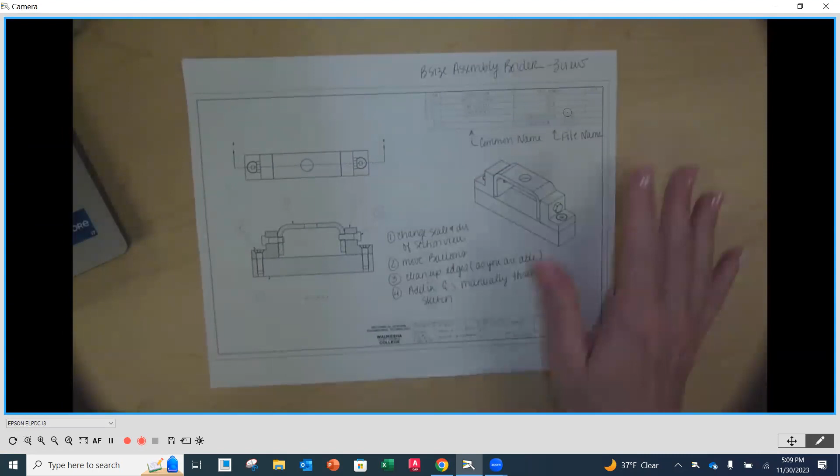So the handout I have up here on the table, if you need to grab it, is this one right here. I have some additional notes, but you're going to be creating this assembly. You'll notice we've got a bill of material up here, so we'll talk about stuff with assemblies. We've got a particular border that we use for assemblies only—this is not the B-size border you normally use for detail parts. This is actually formatted to make an assembly drawing, so it kind of automates this for you. You're going to be putting a pictorial or ISO view in here, and creating a section view so we can see and balloon all the parts.

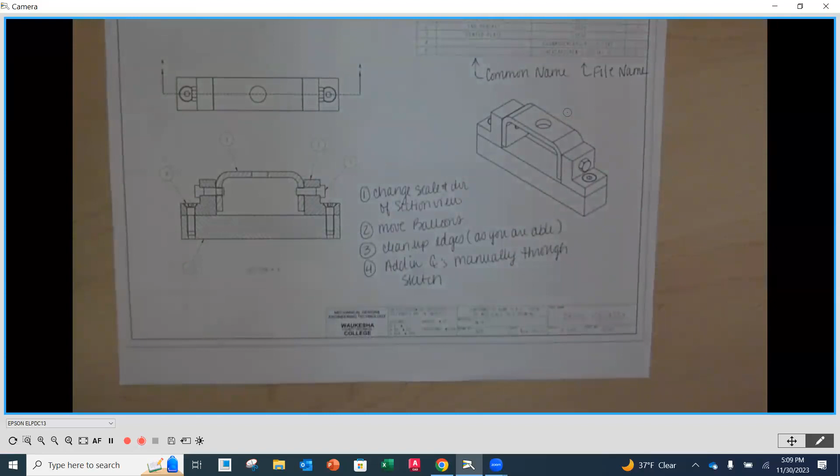So this is what I want to demonstrate for you tonight. Unfortunately, the book we have doesn't do this—it seems like it cuts off just a little bit early. It does assemblies, but it doesn't put them in drawing form. I think that's really important for you to know. So that's what we're going to be doing here.

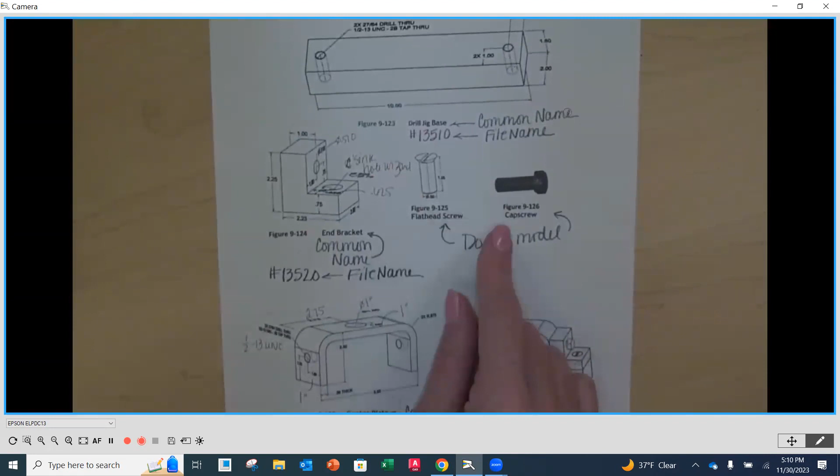The actual assignment sheet is here. For this assignment, you'll be building 3 parts. You're going to create the drill jig base, the end bracket. You will not create these fasteners—we're going to be pulling those in from the library in Creo, and I'll show you how to use that, so do not create those 2 fasteners. Then you'll create this part called the center plate, and they go together in this assembly. It's a small assembly with very simple parts, shouldn't take you long. You're not detailing these—you're just modeling the parts.

So I thought you guys can do that—you'll model the parts. The reason I want you to model the parts is you've probably already experienced, as you go from model to drawing, thinking gosh, I wish I would have used a different view or modeled that a little differently so it would come in easier into my drawing. Well, we've got to think in terms of assemblies as well.

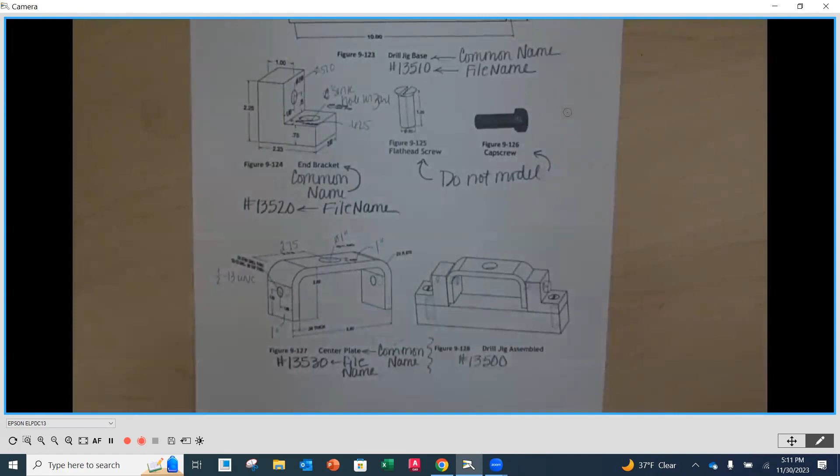So there might be places where center planes might make sense, or the way that you view it, what your front view is, or what your top view is. You want to know how these parts all go together, because that's going to dictate how you model it and how you create the drawing.

So that's what I want to highlight tonight. Now I've already drawn my parts, so I'm going to demo putting this together in an assembly and then also creating the assembly drawing. That's what I need your time for here, that's what this is going to be dedicated to.

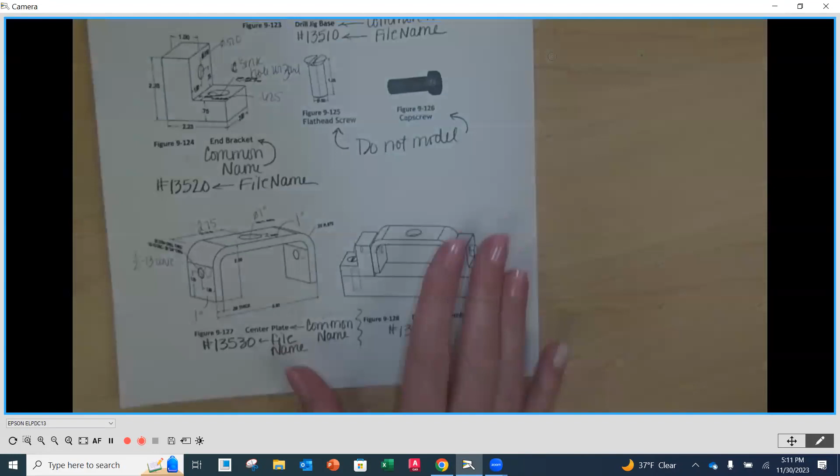So your job number one, when you get this far, is going to be modeling the separate parts here, not the hardware, and then putting it together in your model.

So let me go over to Creo. Oh, I don't have it open. Shoots, okay, just bear with me for just a moment.

So if you happen to be virtual, you know, kind of get these handouts already, they're in our learning plan. Okay, I got to set up my working directory.

Okay, oops, chat. I'm here, but not 100%.

Oh, hi, David. Yes, I know you're not feeling well at all. So thank you, I'm glad you are here. Don't forget, for anybody, if you're not feeling well, I always record these, so feel free to take advantage of that too.

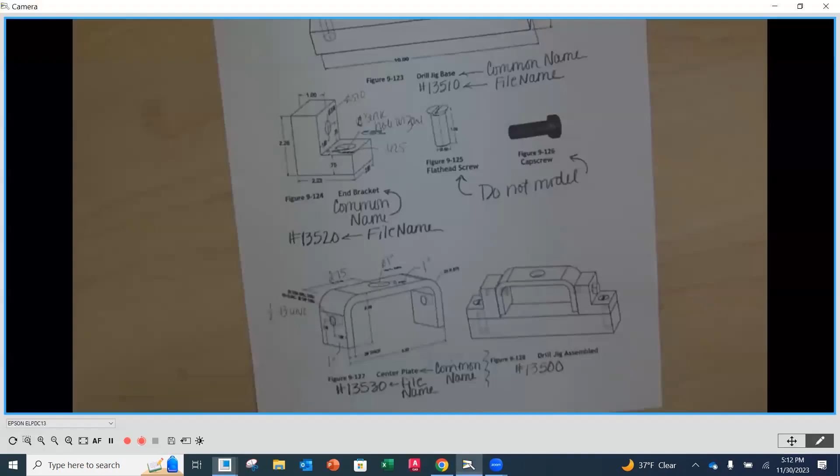So what I'm going to do is I am going to start anew, and I'm going to create an assembly here. Now, when we create our assembly, we're going to be putting our file name in as the number. So on our assembly down here, you're going to notice that the part number is 13500, so that's going to be the part number that we're going to use.

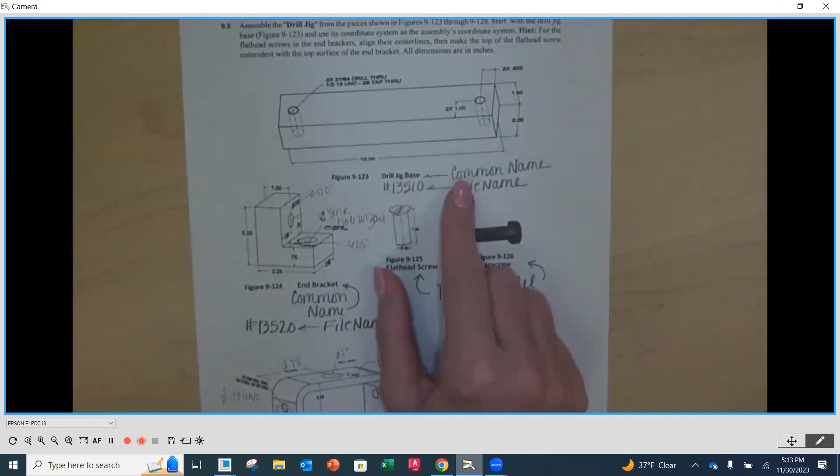Then when we create our, I've already created mine, when you create your drill jig base, your file name is going to be the 13510. But now you're going to be putting in a common name, and you're going to be putting in the part name in common name. I'm going to kind of illustrate that here in Creo.

So you're going to notice file name is going to be my 13500. Now this is going to also be the same thing for when you create a part, or a model. And then common name is going to be drill jig assembly. Now make sure you do that for each one of the parts, because the way that I formatted the bill of material on the assembly drawing border...

You're going to see that we have a new one of those, but I'll get there when we get there. It's going to pull that common name to fill in the bill of material, so we're going to start filling that in as well.

And then I'm going to hit OK. Oh, it does already exist, so let me call it 2.

Sorry. All right, so now you're going to notice that I'm in my assembly mode. So here on my model ribbon, I have the option to pull my first part in for my assembly. So I'm going to go in, and this is where you look at your parts here and want to logically bring in.

Now, does it really matter the order? Not so much, but it's going to be the first one that's the most important one, because that grounds the whole assembly. So you want to think, and most often you want to put this together the way you would anticipate physically putting it together. So we would want to grab our base first.

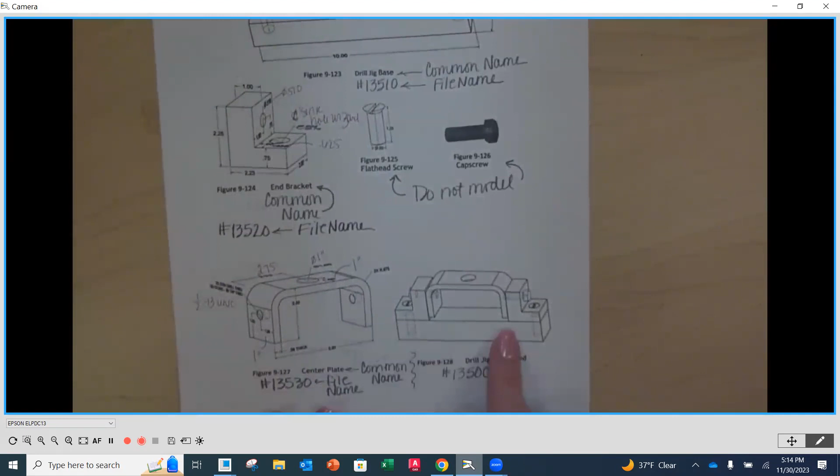So this is called the drill jig base, and I again have mine already modeled. So I'm going to hit the assembly. I'm going to navigate to my working directory where that part number is, and I'm going to open it.

Okay, so then you're going to notice that it's going to automatically come up here and say, where do you want that placed? All right, now this is where, as I look at my assembly, you're going to notice that there is a line of symmetry right down the center here.

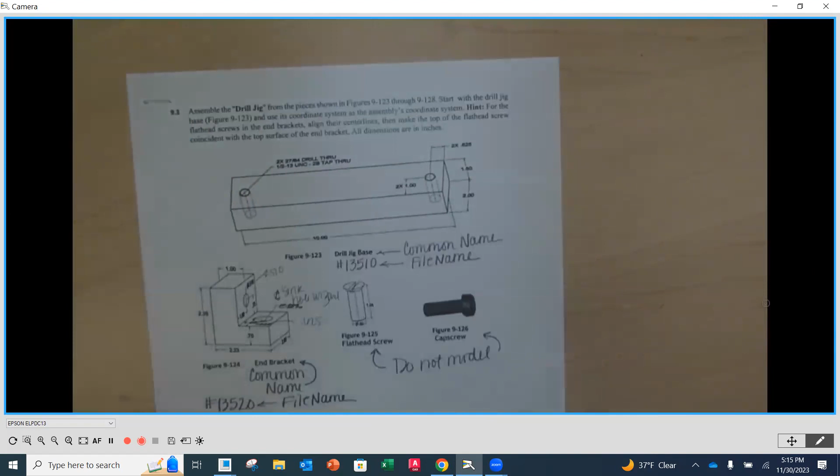Okay, kind of on that, what would be like the front plane here. When I modeled my drill jig base, I put that front plane right down the middle. So when I extruded, I did a symmetrical extrude on that, because I could see that there's that line of symmetry.

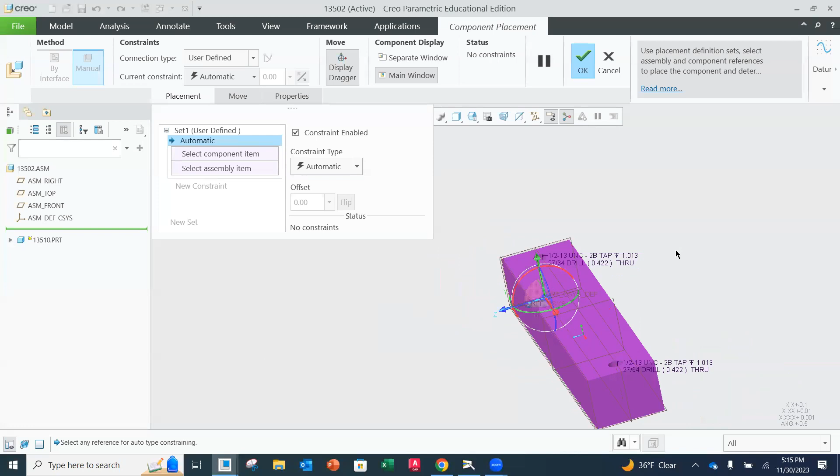And then when I'm in my assembly mode, I can make those planes coincident, and that'll orient parts for me. So what I'm going to do here in Creo is you'll notice that this came in, and there's a center plane down my part. But it's lining up in the back of, if you would, the front plane.

So what I want to do instead is make a coincident constraint, and I'm going to grab the center plane of my part to the front plane of this assembly. Do you see how it moved it so that it's in the middle, so that they're coincident?

Then the next thing I'm going to do is grab a new constraint, and I want to fix this. My first part is always fixed, because now I've got something that's not going to move around.

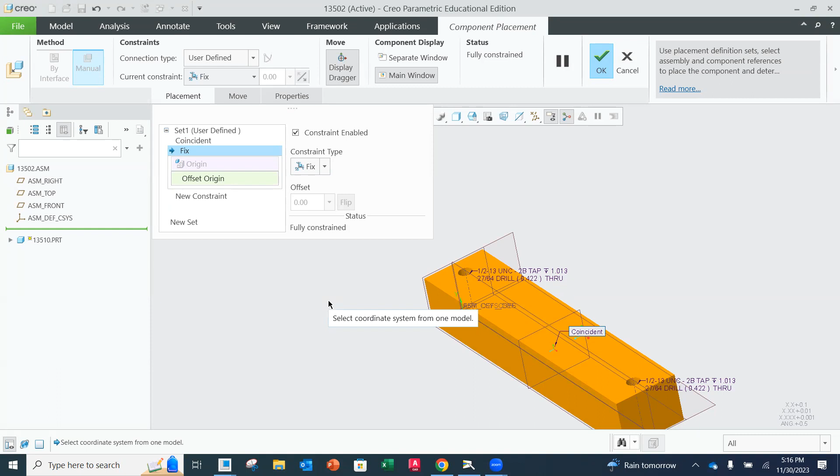They call it something else in SolidWorks. If you guys are familiar with SolidWorks, David, what do they call that in SolidWorks? Is it fix? Maybe you're not hearing me. That's okay. But you always want to do that first part. I forget what it's called, but I think it's this, I think it's when it comes in already defined. No, when you pull in that first part, you usually, what was that? Is it, you anchor it, but it's called something. It is, oh, it is fixed there too as well. Okay, all right, so I guess it is the same terminology.

So now when my part turns this orange color, that means that it's fully constrained, fully defined. You'll learn that if you haven't already gone through chapter 9. So then I can hit the OK button here. Now it will let you hit OK if you're not fully constrained, but that's not a good idea.

And this is where in this assembly, you're going to be submitting the screenshot of the model of the assembly, and then you're going to be doing the PDF of the drawing. So there's going to be 2 parts to this particular assignment. This is assignment number 14.

And over here, if you aren't fully constrained, there's going to be a little rectangle box next to the part number. So when you do your screenshot, I need to see your model tree because that'll tell me if you're fully constrained or not. Depending on how you do it, it should always align with the origin. Yes, you're correct.

Now, the other thing I want to encourage you to do as well is, as we're building these parts and pulling them in, they're all going to be this blah gray color. And it is going to be hard sometimes, especially if you don't have shaded with edges on, to see where one part ends and the other part begins. So one thing I encourage you to do is change the colors.

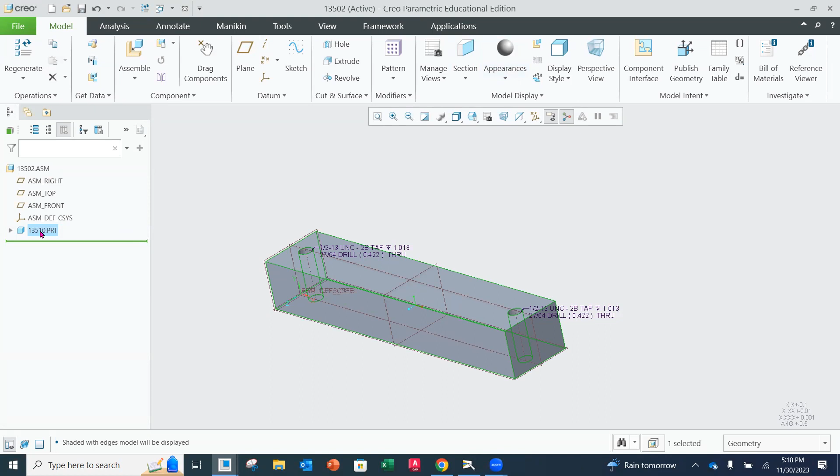And right up here, it's real easy. You just select the part number in the design tree and go up to appearances, and now you can change your color palette. I keep it pretty simple, so I'm just going to assign it yellow. Then as the other parts come in, we'll assign colors too.

All right, so I've got my first one in here. Now I'm just going to hit assemble again, and I'm going to go to my second part, which is 13,520. Open that one, and it's going to pull it in automatically. You'll notice that it's the purple part over here.

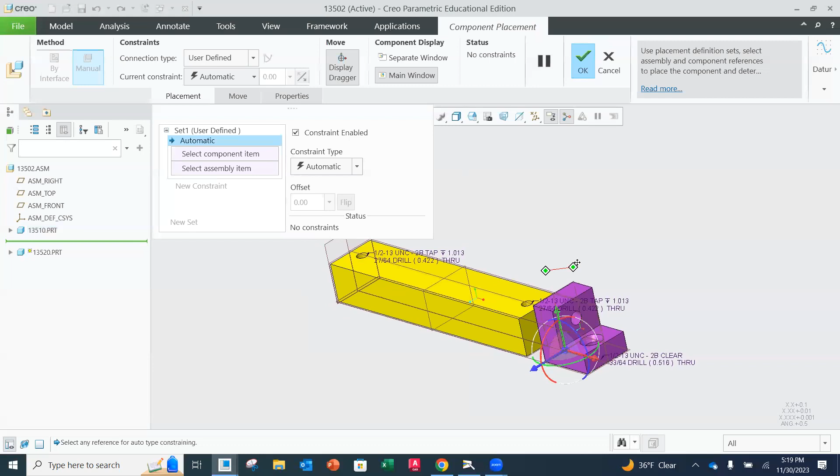And what I like to do with Creo is, if you let Creo or any parametric software make too many decisions, ultimately they'll probably not do what you really want. So I like to get my part as close to being where it needs to be as possible.

You'll notice that you have this globe and arrow thing. If you hover over any one of those, they'll turn orange, and when you left click on it, it'll go in that direction. For instance, let me scooch this up here. I'm going to hover over the green here and lift this straight up, so it only goes in that direction, and when I let go, it stops. There's also these other handles, so this one is going to rotate it around that axis.

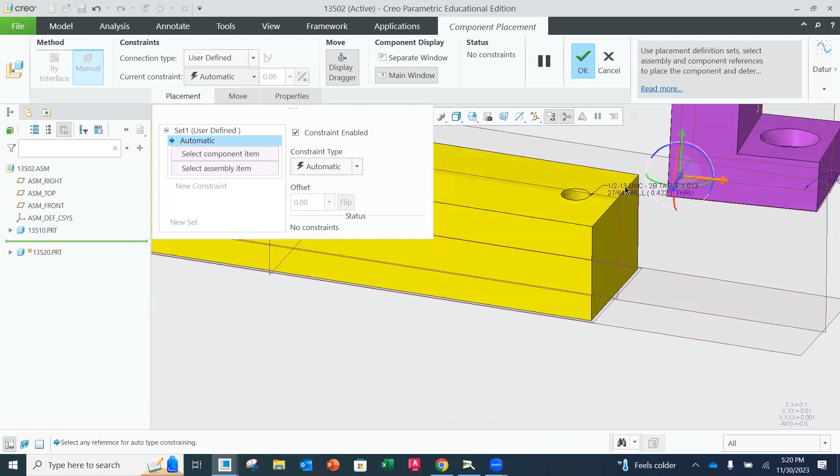It can rotate it in this direction as well. So like I said, I like to get it as close to where it needs to be so that I can still select. I'm going to pull this back a little bit.

You'll notice it's not perfectly aligned right now. It's okay, because I'll do that through my constraints. So now that I have this here, the first thing I want is for the holes to align from my top part to my base. I'm going to change this from automatic to coincident, and click on one center line to the other center line. There we go, now the center lines are in line with one another.

Now in the book, they will also have you click on the inside wall of a hole. You could do that as well, but I tend to align center lines or the axes.

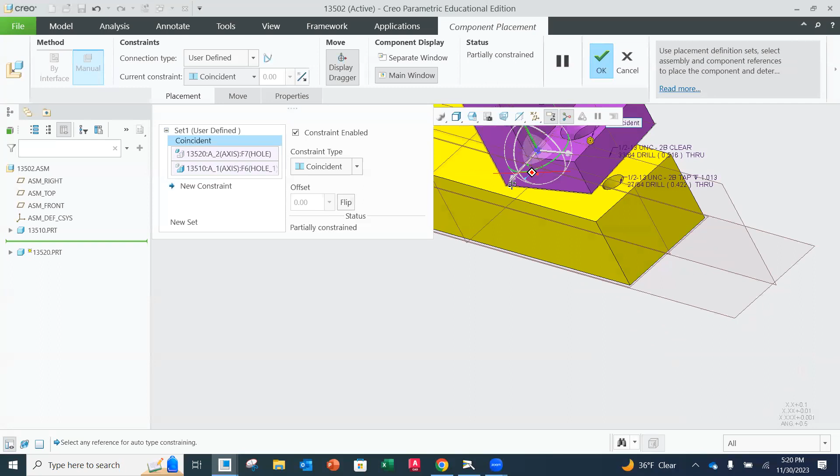So that one's done, now that's one constraint. You'll notice that I'm not orange yet, so that means I'm not fully constrained. You'll also see that I don't have all of my whole globe, if you would. There's a name for it, I forget what it's called, but it's not all white.

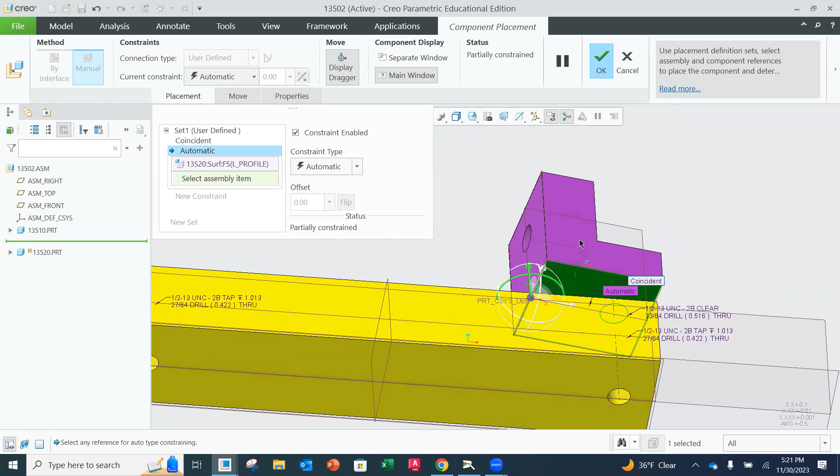So then I need to add a new constraint. My screen isn't too big, I wish it was larger. I want to make the bottom of my part, so you can maneuver this around, select the bottom to be coincident with the top of the base.

Right now it thinks that it's constrained, and the reason it thinks it's constrained is because there is, if you would, a circular feature holding this together. But we can see that it's not straight on here and that's not good.

So we're going to add one more constraint, and that is going to be parallel. I'm going to hit parallel, and I want this front face to be parallel to that side. Did I not grab the right one? Oh, it didn't, it did an axis.

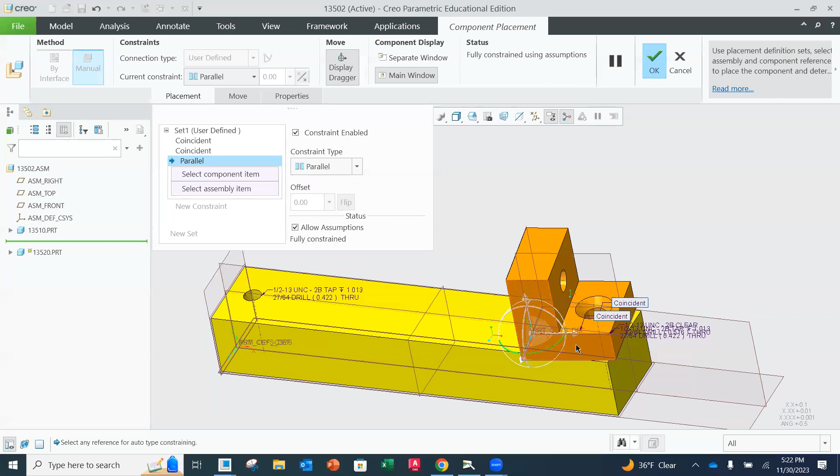So I'm just going to delete it out of there and grab a new constraint. You could try to figure out which one's which, but sometimes I'm just like, nah, I'm just going to do it myself. And here's where turning some of these planes off sometimes is a good idea.

So I'm going to make sure I'm on the right plane here. There we are, the surface. I feel like I might be grabbing one of the planes, the surface. There we go, now it's straightened out. I think it grabbed either an axis or one of the planes.

So now I'm fully constrained, and you'll notice that that little globy thingy went away. This one's in place, I'm all good. And when I hit okay, notice that I don't have any of those rectangles. So now I'm going to change the color of this one, I'm going to make it blue. And then I'm going to add the other one in.

Now remember, if you've read the chapter, it tells you don't mirror parts in an assembly. You need to pull the next one in because it's like using that for the quantities in the bill of material.

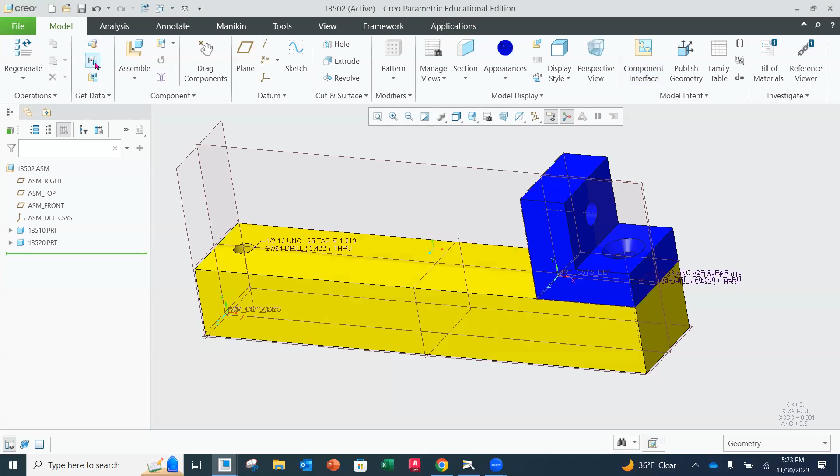So now we're going to do that very same thing. We're going to do the same part, pull this in, and this time push it over to the other side. We're going to turn it around that, and then I'm going to push it up and bring it back over.

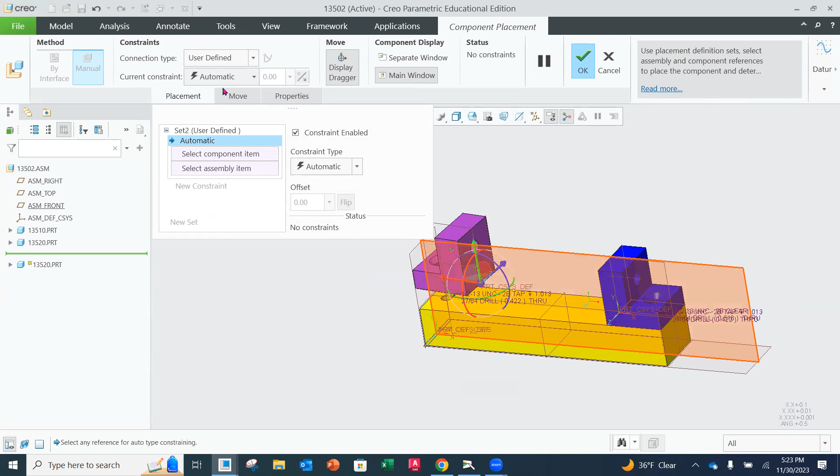So then now I'm going to go through that same process. I'm going to do coincident, and go axis to axis on my holes. Then I'm going to do another coincident, so I have to add a constraint, coincident, and I'm going to go from here to the top. And then my last one is going to be a parallel.

I could even do the side surface to the front surface, that would be fine too, just so that it aligns and that they're straightened out. And now I can hit okay. I'm going to put my blue color on that one as well.

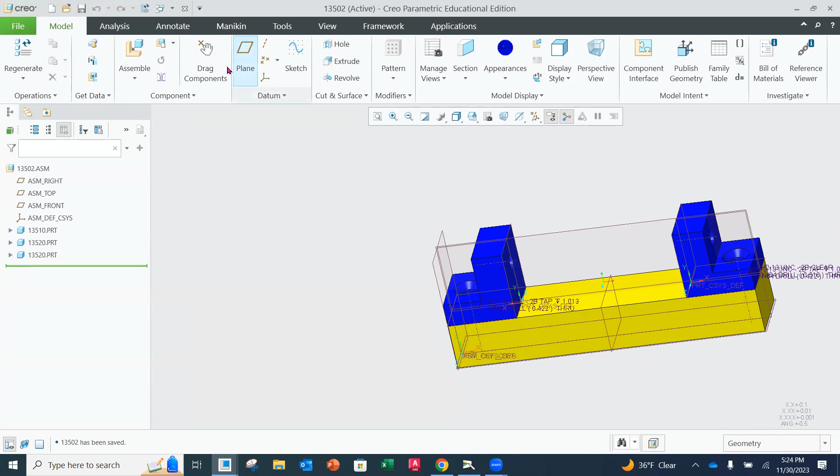And here we are, so not a bad idea to do a quick save. And then now I'm going to drop in my third and last part. So I've got to do my assembly, 13530, here's my next part. I'm going to bring this one up and over.

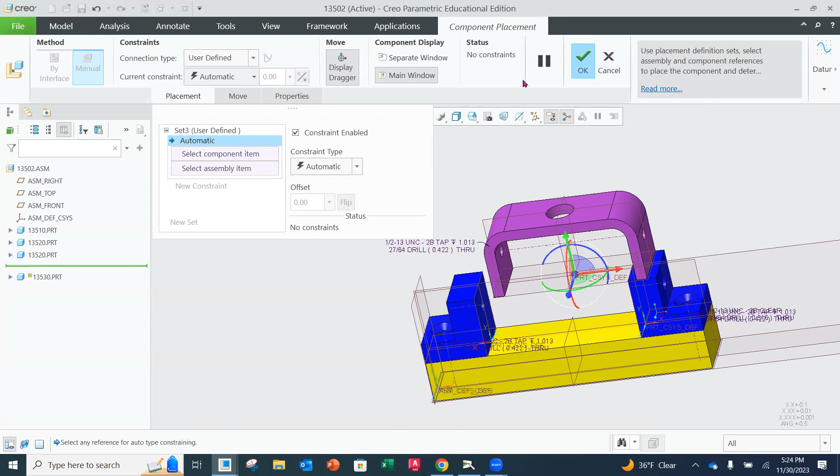And now for this one, because this has that center plane, you're going to see on my part here in the bottom, I've got a plane assigned. I added that plane to the middle of the part so that I could align it with this part right here. We talked about that last time.

I'll hit cancel for a second. I'm going to open up my base. You're going to notice that I have this datum plane number 1. On my model ribbon, I can add a plane at that level.

And I added it as a reference from the right plane, 5 inches in, so it would be right in the middle of this 10-inch long base plate. So you need a plane there to do this. There are other ways you can do it, but this way it keeps everything nice and centered.

I'm going to go back to my assembly, and I'm going to re-pull in that part. Open. All right, so I'm going to pull this up. I'm going to push this back.

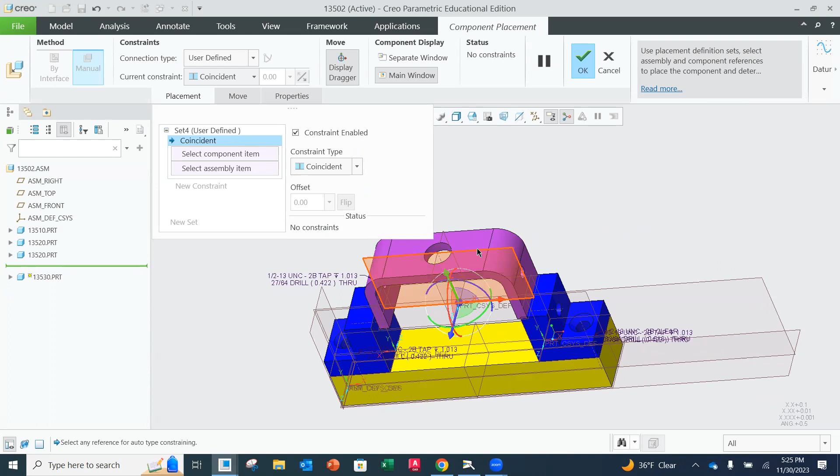And the first thing I'm going to do is make coincident this plane on my part to the center plane of the assembly. So those two are coincident right now.

I'm going to do another one. Now I'm going to take the center line of my holes here and align them with the center lines of the holes on those side plates. You'll notice that this is like into the side of that one part, right? And I'm not fully constrained yet.

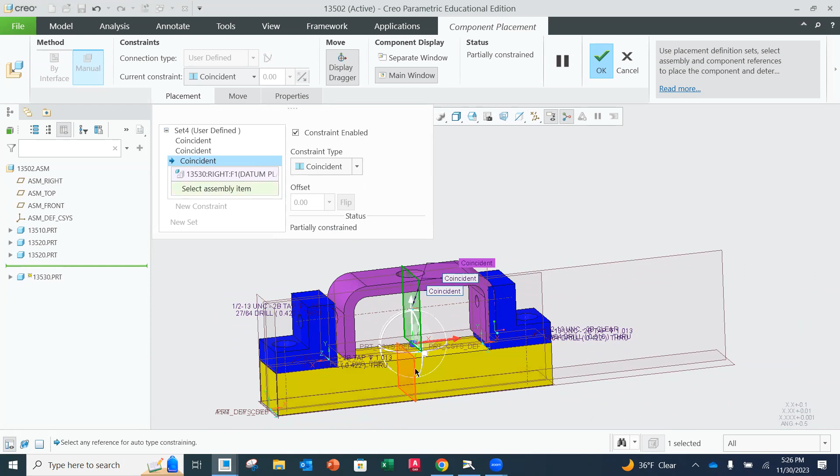So now this is where I'm going to make coincident, new constraint, coincident, and it's going to be that center plane of my top to the center plane of the bottom. Now I'm fully constrained, and it turned orange and I can say okay.

And you'll notice that you have to align the holes. Don't align the part on the bottom, because otherwise those holes aren't going to line up. So the holes have to line up.

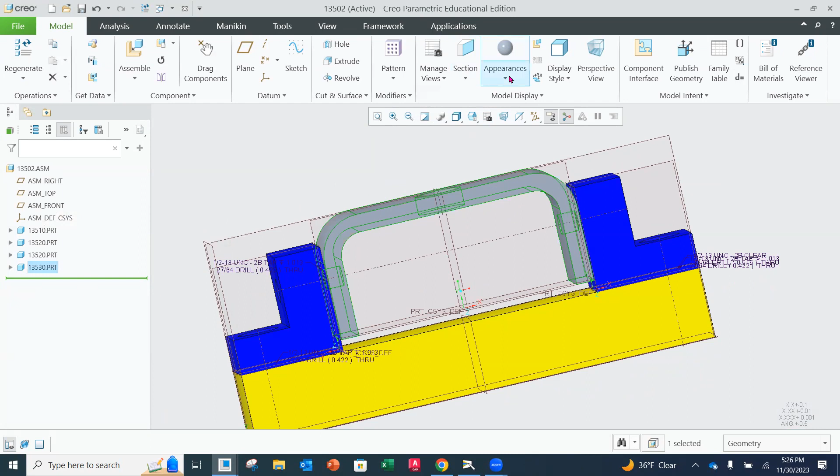And now I'm going to change the color to be red for that. So I've got all my parts in place. I'm going to do a file save. You'll notice I don't have any rectangles over here. I'm going to scooch this over.

Oh, I got two more things to do. I've got to put fasteners in place, right? I got to show you that. So you do need to do that before we leave our assembly mode, otherwise we won't have our fasteners in place.

Now, this is a little bit different. This is a new tool that we're going to look at. You're going to go to the tools tab, and all the way over to the right, we have screw and dowel pins. This is called intelligent fasteners.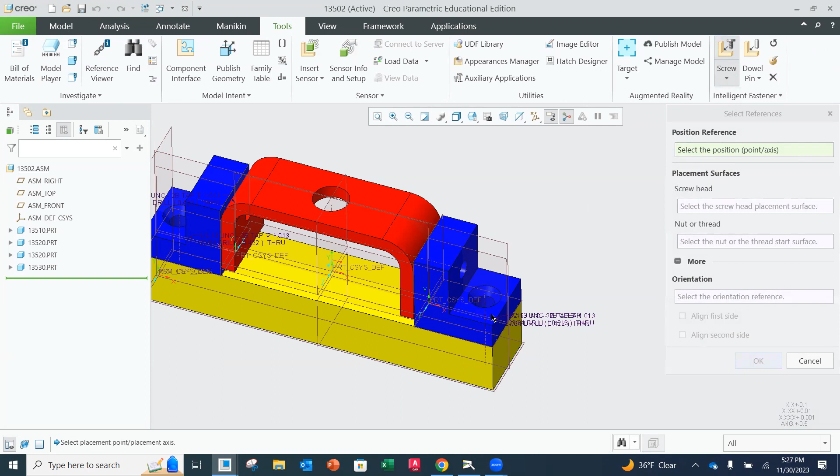We're going to click the screw, and we're first going to put in the screw in the countersunk holes. So I am going to grab, it wants to know, select the position, so I want to grab the axis for this.

And then it wants to know, where is the screw head going to start? It's going to start on this surface right here, the top. And where is it going to go through to? It's going to be the bottom surface here. Now you're going to see it's going to be on center, and it's going to show in between there is where I'm going to put my fastener.

Don't worry about orientation, we can skip that. We're going to hit OK. Now this menu is going to come up at the very top. We want to pick the catalog, just plain inch. Don't do ANSI English, you do just regular inch.

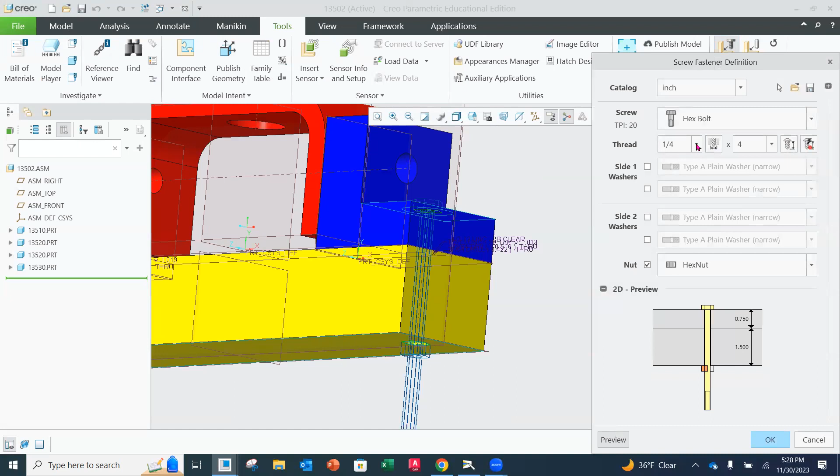And then we have to look back on the base. These are half-13 UNCs, so I'm going to go to half. And then I am going to click on not the hex bolt, but I'm going to arrow down here, and I'm going to go to countersunk screw.

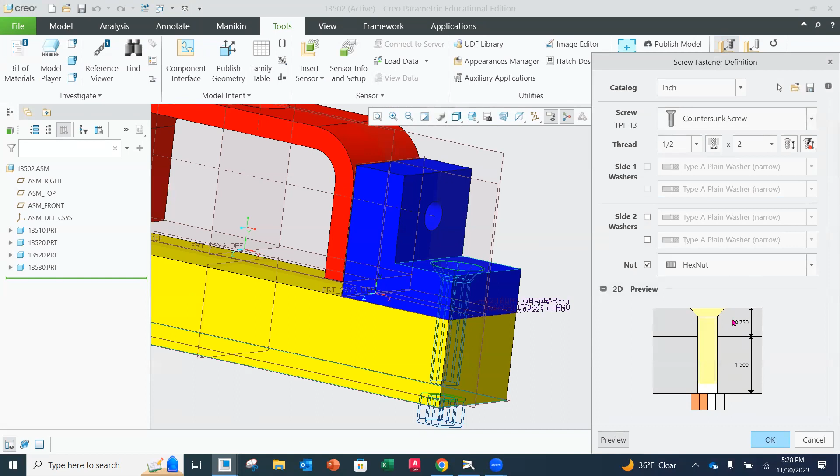And then I'm going to set my depth, or the length of this, to 2 inches. So now you're going to see that it's, oops, I hit okay too soon. Shoots.

Let me go back in here. Is it going to let me do that? Is it going to be difficult? Dang it, feature. Okay, I'm going to actually, it's going to be easier for me to just delete this out. I do want to delete it. I put a nut on the end of it, and I forgot to uncheck that, and I accidentally hit OK.

So I'm going to go through that process again: hit the screw, grab my center line, select this top surface, select the bottom surface, and you're going to see these. If you didn't select the center line, it would be offset from this somewhere, and then you'd know you didn't grab the right place.

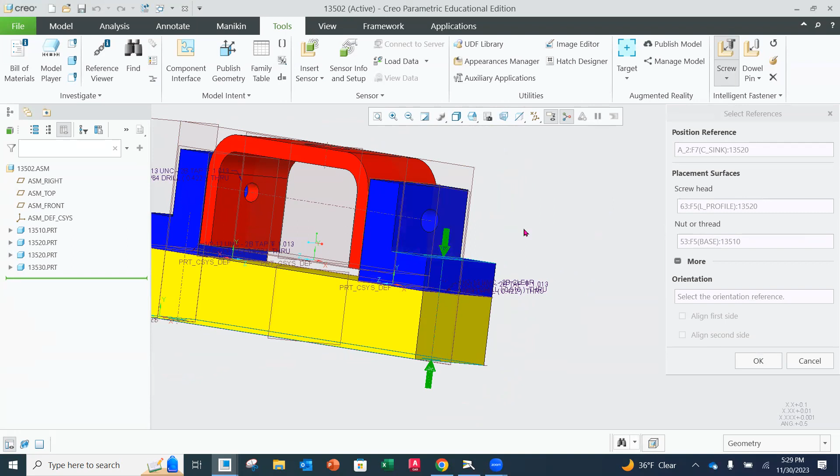Ignore orientation. It's on inch, countersunk screw, half inch thread. And then we want it to be 2 long, and we want to uncheck the nut on the back side. We don't want that in place there. And then it's going to give you a preview here of what we have, and then you just simply hit OK. And now you're going to notice the fastener is in place.

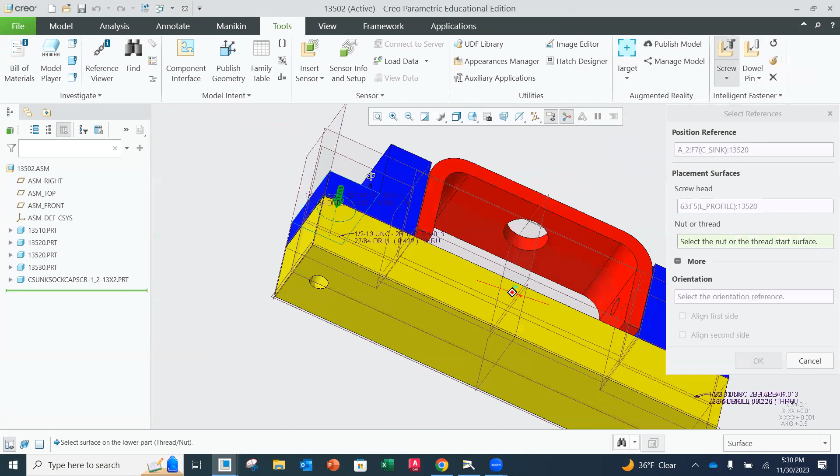Isn't that nice? Do it again on the other side. Again, you don't want to do the mirror on this. So: screw, select the center line, the top, the bottom, ignore the orientation. Everything should be remembered here. Make sure that the nut isn't on there, and then we're going to hit OK. And there we go.

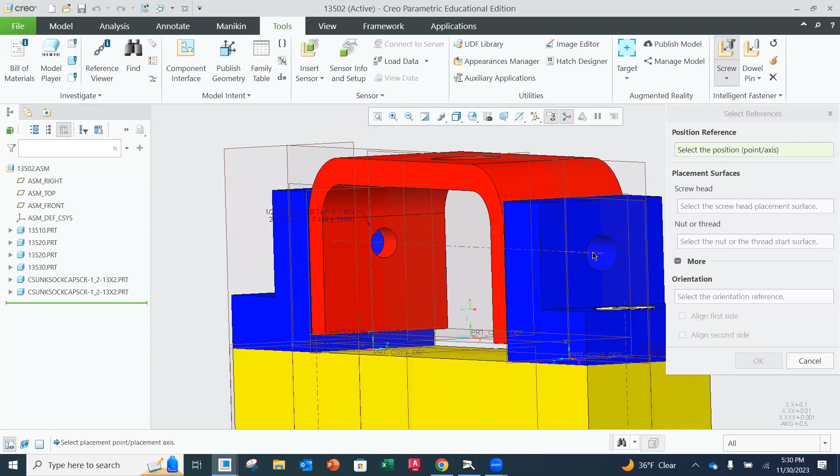Then we're going to be putting in the bolts on the side. So we're going to go again to screw. This time we're going to be on this center line, and we're going to start with this surface with the head, and on the back side through that surface. Okay, let me scooch this over. So it should be right on center there with those arrowheads. Ignore the orientation. Okay, this time we're going to keep this on inch.

We're going to go to the hex cap screw. Not a hex bolt, a hex cap screw. There. Make sure there's no nut.

Now I'm going to show you, I don't know why it does this, but it does. I think it thinks it's doing us a favor, but you're going to notice that it's going to put a counter bore in here. We're going to fix that. So it's going to say okay, and now it's like buried underneath here. And if I put on hidden lines, you're going to notice that it's under the surface. So I'm going to go back to where I was.

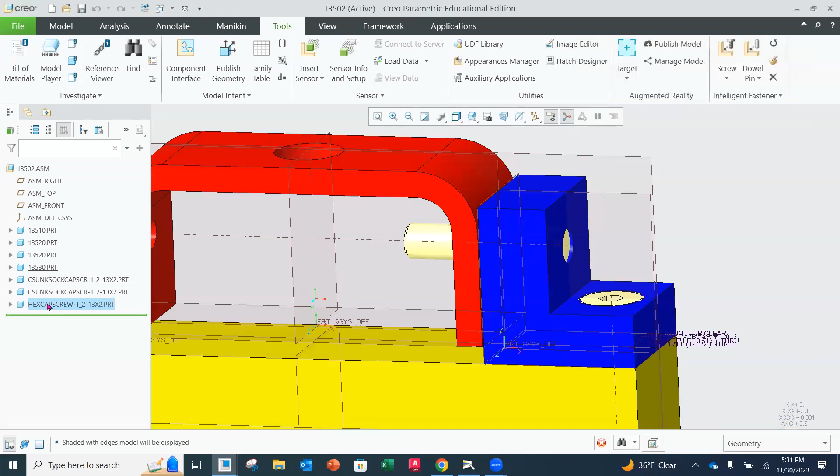All I'm going to do is go into this hex screw, and go to edit definition. What that's going to bring up is its placement, so we're going to click on distance. This is the distance that created a counter bore, or put it down below the surface. All we're going to do is change that offset dimension to 0, and it's really just like coincident. And now it came out—see that? So instead of being a distance into it, it's actually going to be on the surface now. And we can hit OK.

Oops, I'm a little bit long there. That's not good, so I need to make this shorter. I didn't check that length, I think I was too fast on it. So we'll just go through it again, no big deal. Go to screw, and again it's a little bit easier just to redefine it.

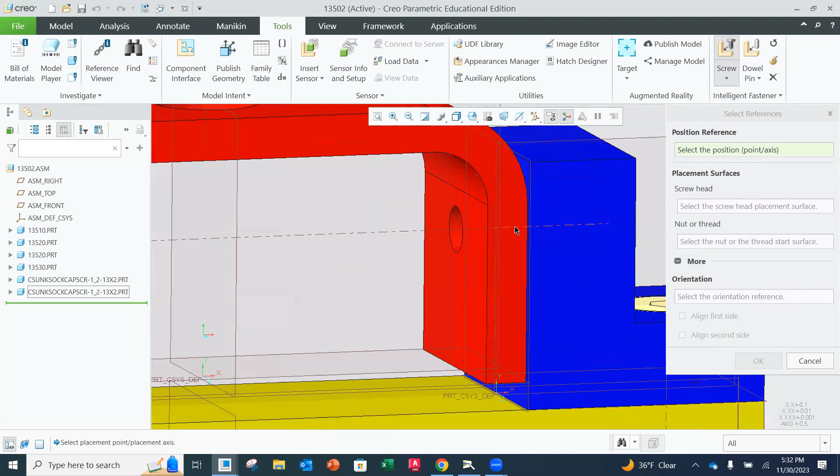Because then we can make sure it's right. And we want to go from this surface to that surface. Okay, and I want to change this to—I've got to look on my bill of material—1.5. The other one was 2 inches.

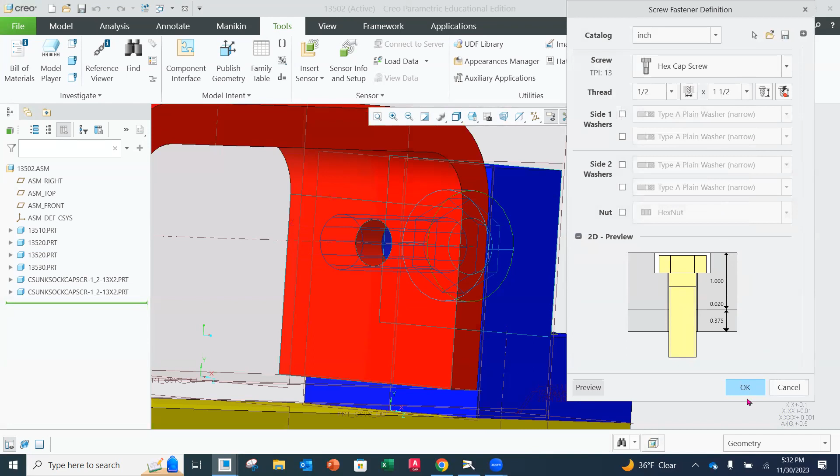Okay, so it's going to stick through right now, but then we want to go here, edit definition, and go on the distance constraint and click 0, enter. And now it's going to stick out a little bit, but we want to make sure that we get all the threads engaged. So this is perfect and that won't be in the way.

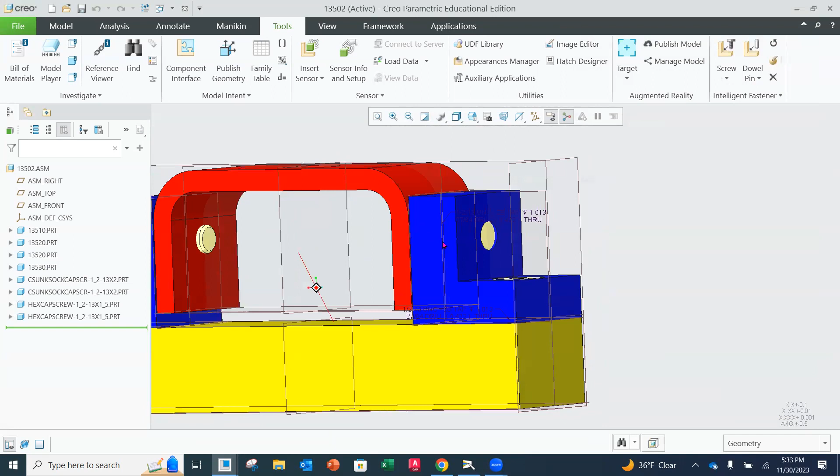So now we're going to do that very same thing on the other side. We get to do everything twice here. So screw again, don't do a mirror—not a good idea, not in the assembly mode. Here to here, okay, this looks good, 1.5, it's remembering. Okay, it's down underneath. Edit that definition, and then we're going to go to the distance and set that to 0. And we are good.

Now we have all of our stuff in place. So at this point, what you want to do is clean up your view here.

If you save this with all of the notes and the stuff, it just looks yucky. So what I want you to do is always turn off all of your axes, all of your planes, and now it looks neater to do your screenshot.

Now I'm going to do my screenshot, Windows Shift S, and I'm going to go up in my corner and include the design tree. And then all you want to do is capture this. You don't have to go all the way out here, you can just go right here and we're good. And then that's going to be what you're going to upload for the model of the assembly.

Now we're going to take this a step further. This is new stuff, kind of a review of what you learned in chapter 9. Now we're going to make a drawing with this.

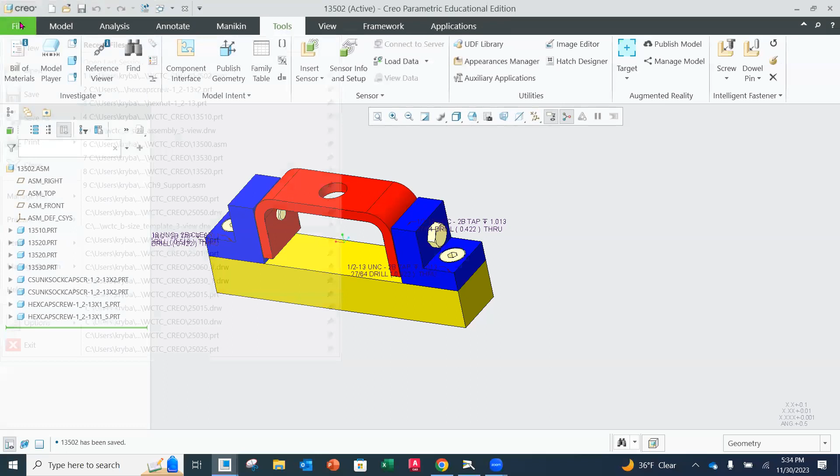So I'm going to do one last save. I'm going to manage, delete old, and okay. We're going to make a new drawing. Now I'm going to go back to our canvas. We're going to go to modules. And at the top here, underneath the Creo drawing borders, there is a new drawing border.

There's an English assembly border, it's a B-sized assembly 3 view. You need to download this, okay? You only have to download this one because it's using one of the format files from up here, it's using the B size. But what this is going to do is set up for us the special settings and the bill of material and the balloons to automatically come in. So it's a little bit different than the regular ones up here.

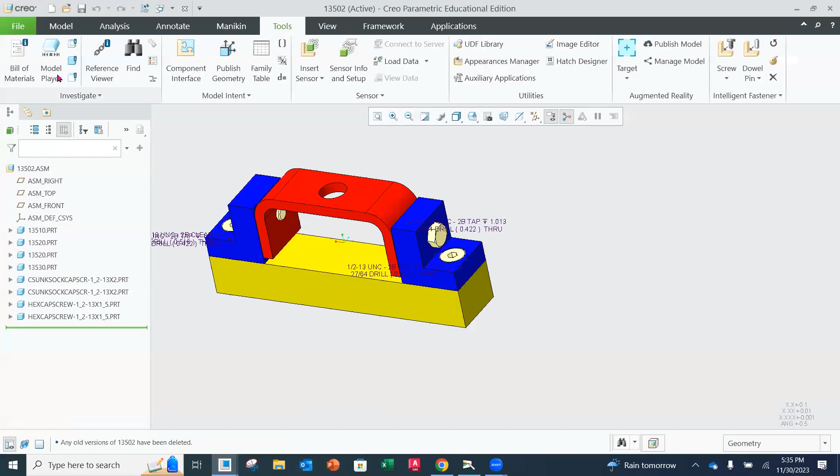Now, and okay, let's do that. So I've got mine downloaded already, so you're going to have to download that. I'm going to go back to Creo, my assembly. I'm going to go to File, New, and I'm going to do drawing this time, okay?

And my drawing is going to be 13502, right? Yep. And I'm going to say, use the drawing model. Oh yeah, it's in the background. And then I'm going to put the common name in here as drill jig assembly. Okay, and now it's going to grab that assembly.

It's going to, I got to browse to mine, now this is where they're very close. You want to grab the one that says assembly, not template. Okay, and it's going to have 3 views and you'll see what this does. So I'm going to hit okay.

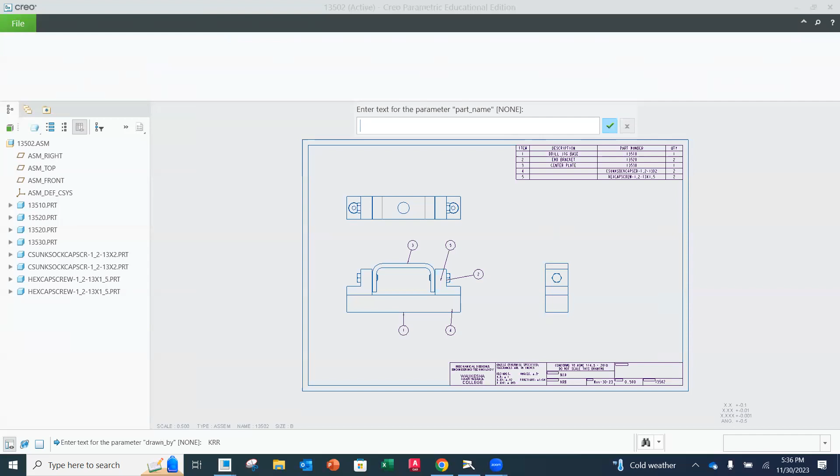And now you'll notice that it automatically comes in for me. So it's my WCTC border and it's doing that very same thing. Now it wants me to put material in, but material is non-applicable for this, so just put N/A, non-applicable. And then you're going to put in your initials like you normally do. And then you're going to put in the drill jig assembly. And then it fills in our title block for us.

Let me zoom in here. So let's notice that our title block is all filled in, it's the very same title block that we've been using, which is exactly what we want. But you'll notice that it created automatically for us a bill of material. A bill of material is going to be the list of the parts that corresponds to the balloons that are on the drawing. They're going to call out where these parts are located as they go together. It's also going to include the description here, as well as the part number and the quantity.

So again, don't mirror your parts in the assembly. If you do, it's not going to record the quantity correctly. So down on the bottom here, these part numbers for the hex cap screws and the countersunk flathead ones, they're coming in as 2.

Now let's look at the bill of material. I'm not crazy about it, but this is how it has to work because we're using the standard stuff from Creo. I have to try to figure out if I can get this to work right, but for right now, this is what it is.

So the part number is pulling from the file name, meaning the number that you called it and saved it as, that's what your part number is going to be. So make sure you save these files as their part number, same thing with your vise assembly. Then the description is pulling from the common name when you create the model.

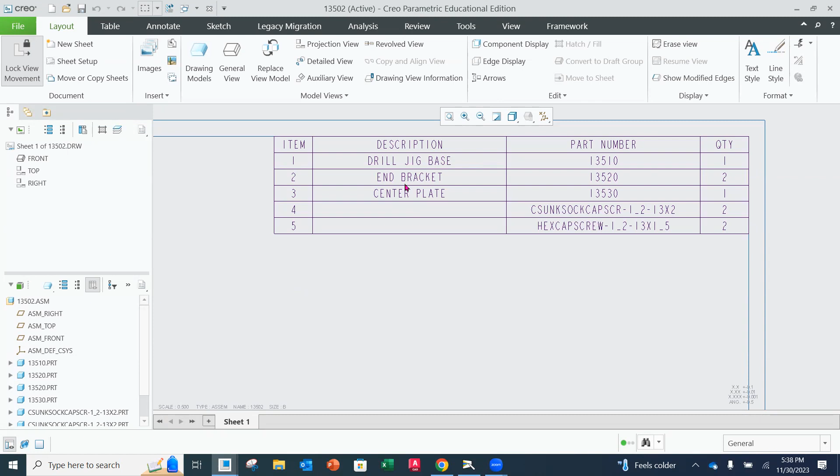So this time, instead of just going past the common name and just saving it as a file, you're going to put in an actual drill jig base, end bracket, and so on for each one of the parts.

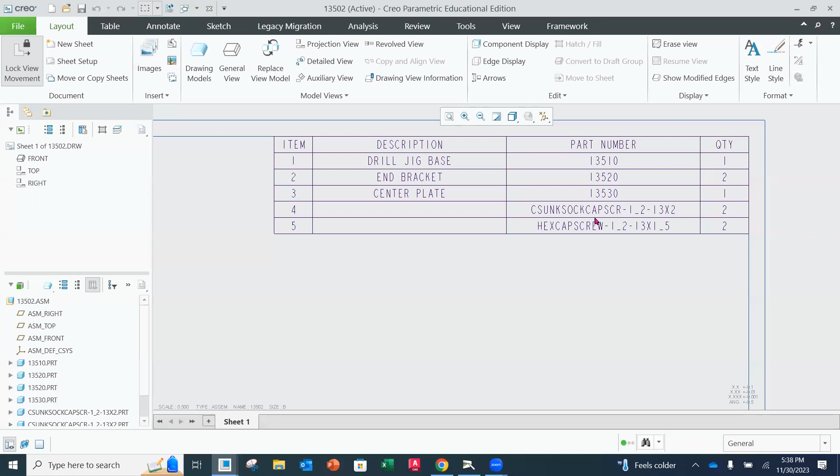That way, when you do this, it's going to automatically populate. Now, we could put a general note in here, but the problem is it's not tied to the parametrics of the model. So we're just going to leave these last two open and let Creo put its description in for the standard hardware, because it's nicer to use standard hardware than have to draw them all. So this is better, we'll just not worry about that part of it.

Now, as we look here, notice what it also did for us: it created three views, a front, a top, and a right side view. We don't need all three. This is a pretty simple assembly. In some cases you will need all three, but I'm going to select this view on the right and delete it.

Now let's look underneath and look at the assembly that's here. So we're going to add in a general view over here, an isometric. And the isometric is nice just because it's easier to visualize everything.

So I'm going to go back to my drawing here, and I'm going to be on my layout tab. I'm going to also unlock this, and go to general view, not the drawing models. Okay, and we're just going to click right about there. I'm going to go to view display, and I want that ISO, and I want this to be no hidden, and I think none. Apply. Let's go look at it.

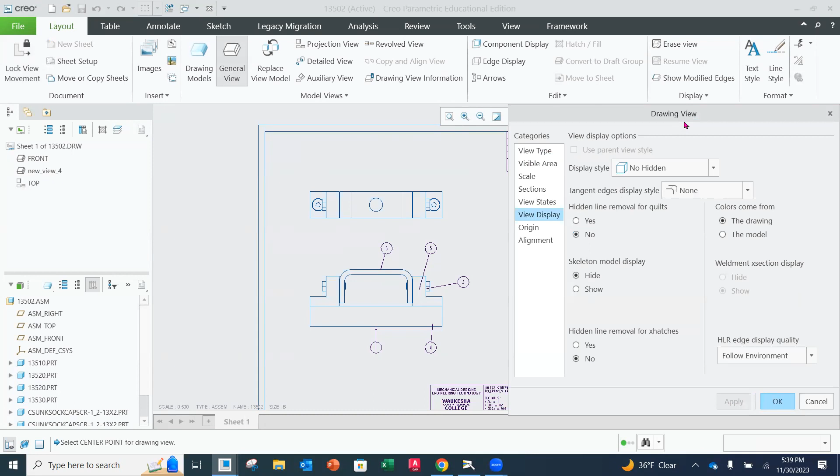Yeah, that looks good. Okay, so then I'm just going to leave that isometric over there. Now remember, if you change the scale of it, make it larger or smaller, always take out that 'scale is equal to', because it's just unnecessary text on a drawing. It's really just there for pictorial purposes, clarity only. You're not getting any dimensions off of it, so you don't need to put that scale on there.

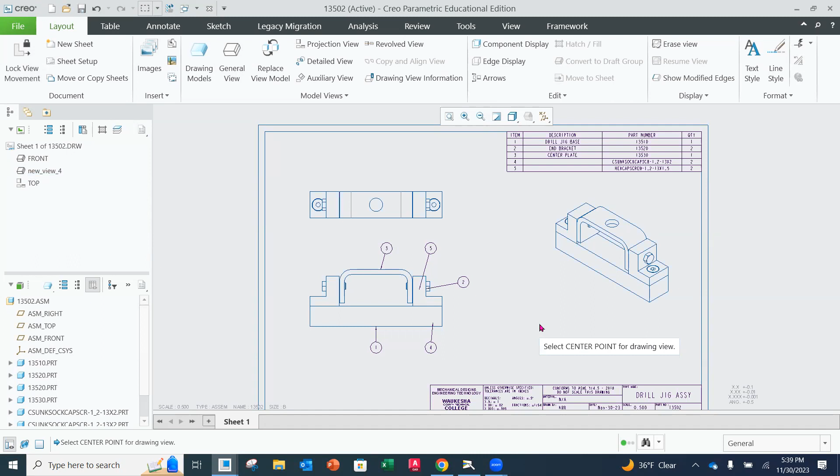Now, the next thing we're going to do, you're going to notice that this is a section view from the top. Okay, so we're going to create a section view. It's always good practice to do section views. So we're going to go down here, and to do that, the view has to be here, which it is.

I'm going to click on it, go to my edit definitions or the properties, go to sections, 2D section, plus planar. Okay, single, done. I'm going to call this one A, green check mark.

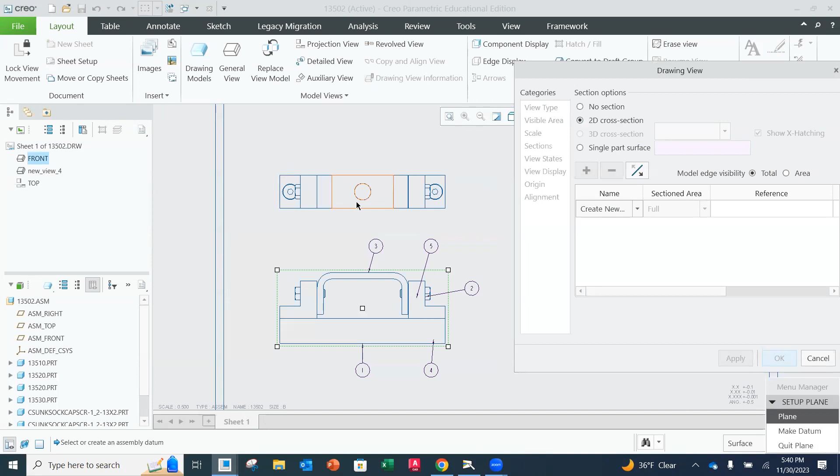And then I need to select my plane. The plane that I want this to go through is going to be through the very middle of my top view, which is the front plane. So over here, I'm just going to click on the front plane of my assembly.

You'll notice that the A populated, and Jacob and Hans figured this out last night: if you go all the way over here, there's an arrow display. If you click on that arrow display, it says select an item. If you go right here and select the top view... oh yes, it'll happen, but you have to hit apply. Now look at it, it adds the arrows right there, rather than having to go back to the layout tab. So if you happen to remember to do that, you can do it in either place. Now I'm going to hit OK.

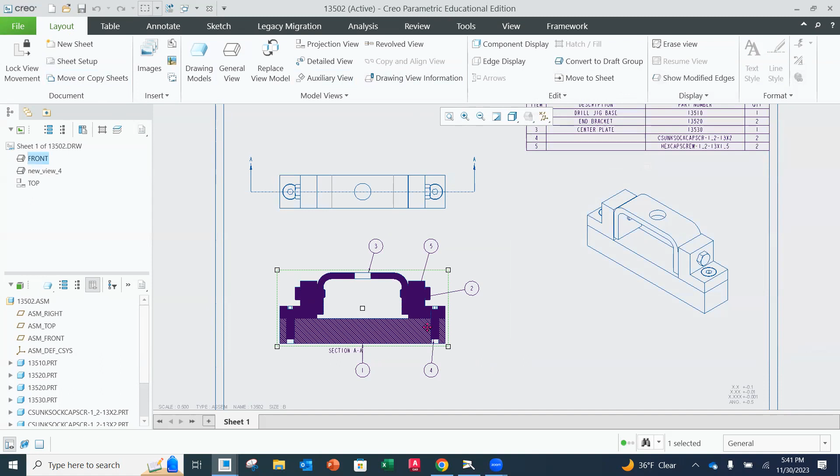And I need to clean up this view. So a couple things — I don't know why Creo does this, but it always puts the section view right by the view. Always move that down and away. But it also put our balloons on nice, though you can see here that our hatching is kind of all over the place.

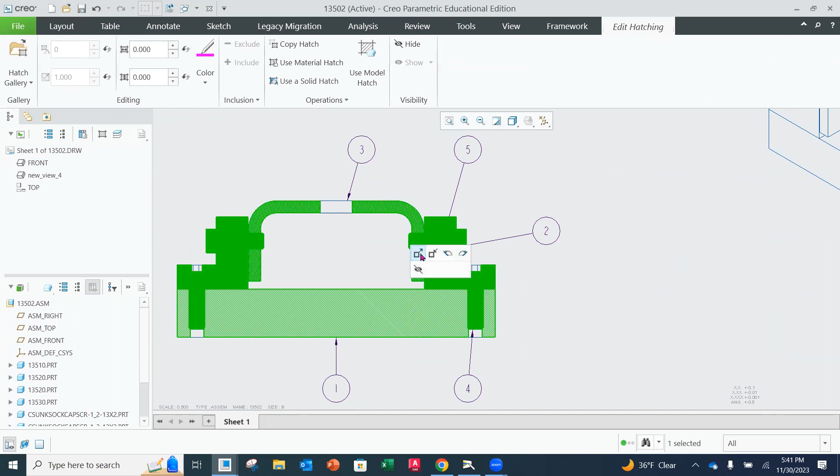Now, I'm going to click on it and make it larger, larger, larger, and then I'm going to go to the other one. I'm going to make this one larger individually, and then do that for each one of these.

Now, a couple things you're going to notice here is that what Creo already did for us is it put in place the hatching so that anything that's next to each other goes in opposite directions. That's required, so if you're adding hatch on anything, make sure you do that. It's also a good idea to mix up the patterns a little bit. So if I select this pattern right here, there's a hatch gallery over on the left-hand corner, and these are all your options. Do not go crazy.

Don't put stars in, please. We want to keep this professional.

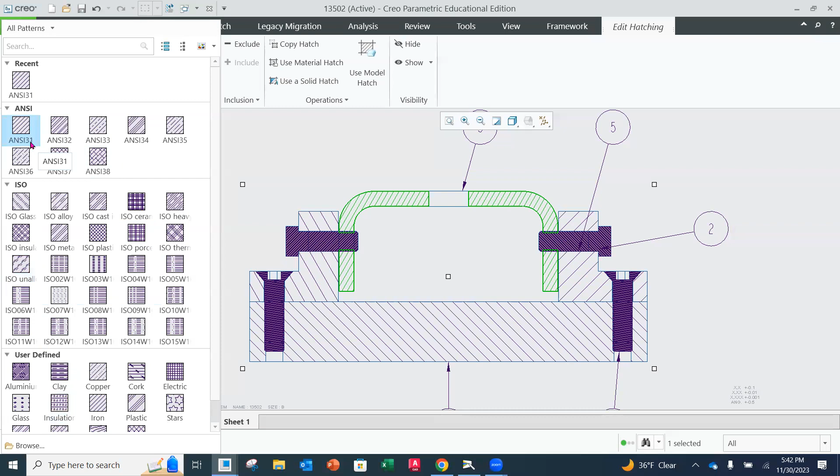So the most popular ones are the ANSI31 and ANSI32. I'm going to change this one to 32, and then make it larger again. These will be a little closer together, just to give it a different look, different material. Now, for the fasteners, we're going to take the hatching out. We don't hatch the most inside parts on an assembly—that's one of the rules.

We're going to click on one of these so it's selected by itself, and simply hit hide. Then click on the next one, hide. We might be able to use control—sure enough, yep—and then hide. So you can use the control key to multi-select.

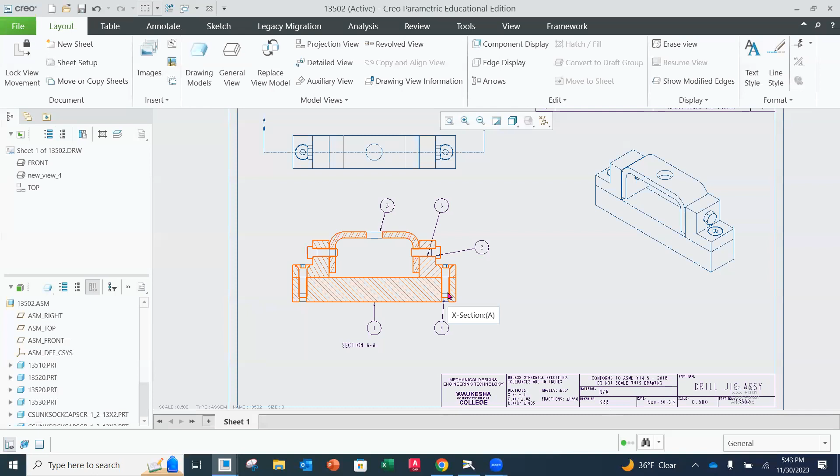So what do you think about that? That looks kind of good, right? It's really not hard to make these assembly drawings. That's why I'm like, why didn't they just add it in the book? It's pretty straightforward, but they didn't. That's okay, you're getting more for your money. How about that?

Now we want to do a little cleanup here. You'll notice that part number 5, if we look at our bill of material, is the hex cap screw, the one coming out here. And part number 2 is actually that L bracket on the side. So they're kind of ballooned a little wonky.

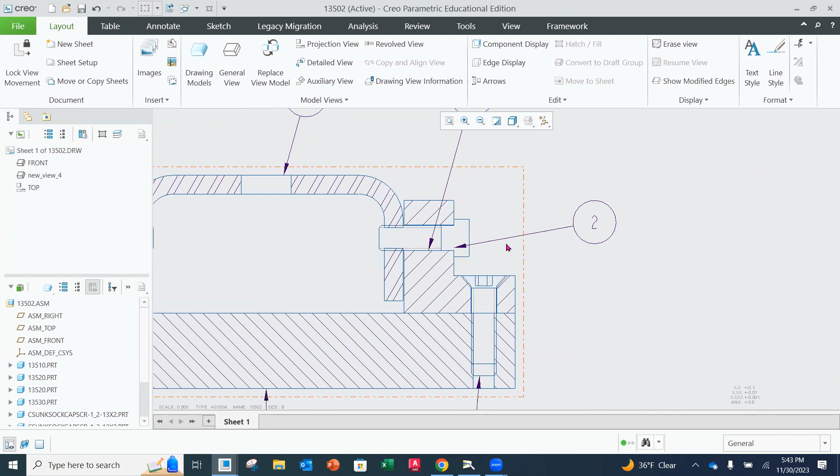So what I want to do is take number 5 and put it on the other side over here. I'm going to grab my balloon and move it over here, but notice it stays attached. I don't want it to be over there and then cross over—I want it to actually be over here.

So I need to go to the annotate tab and hit attach. I'm going to click on this arrow right here, and then click on the end of this—whatever that's called, a hex bolt, okay, or a hex head cap screw. And now it's going to place it there.

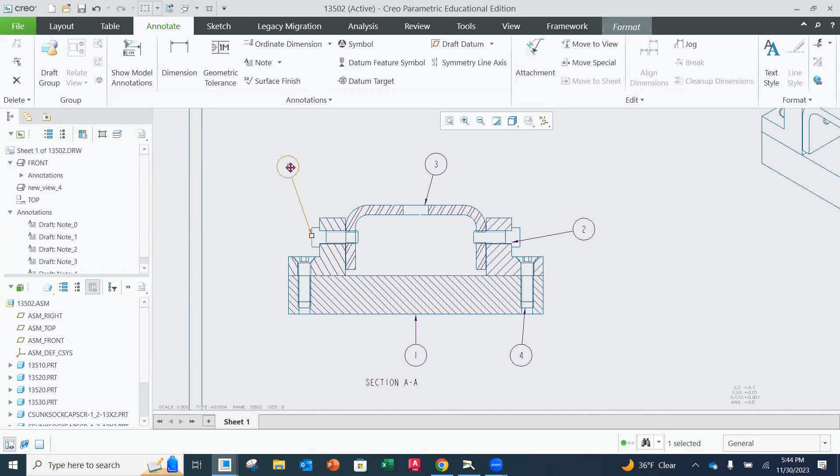And if you don't really like where that's at, you can click off of the attach, and then maneuver this around the way you want it to go.

Number 2, I'm going to switch from where it's at right now. I'll put it like up here, and then move its attachment from here to here. There we go. And done. Okay, number 4 isn't in a great place either.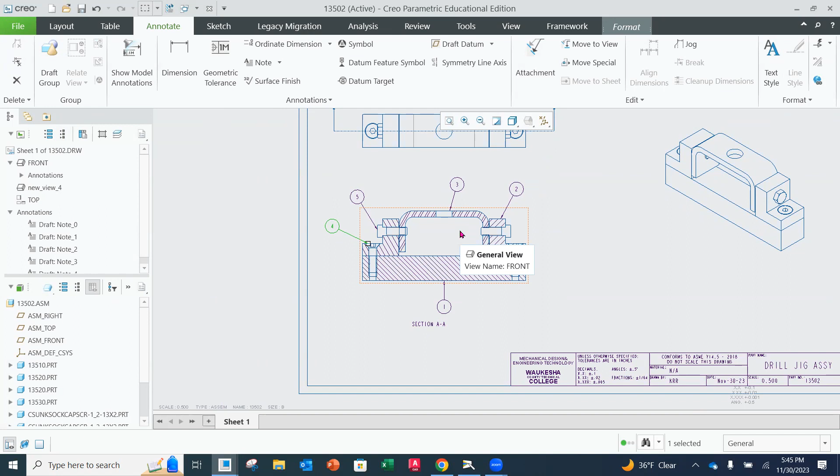So I'm going to take number 4 and put it over here, and we're going to do that same thing with the attach—attach it here instead. And done. You can play with those so they look nice. You don't have to do them in the exact order, but as long as they're easy to see and read, it's totally fine. Play around with that a little bit.

Now, is there anything you notice that is missing from this drawing, from this view? Does anybody see it? If you're online, feel free to chime in. Do you see anything that's not in this view, in this section view? There aren't any center lines, right?

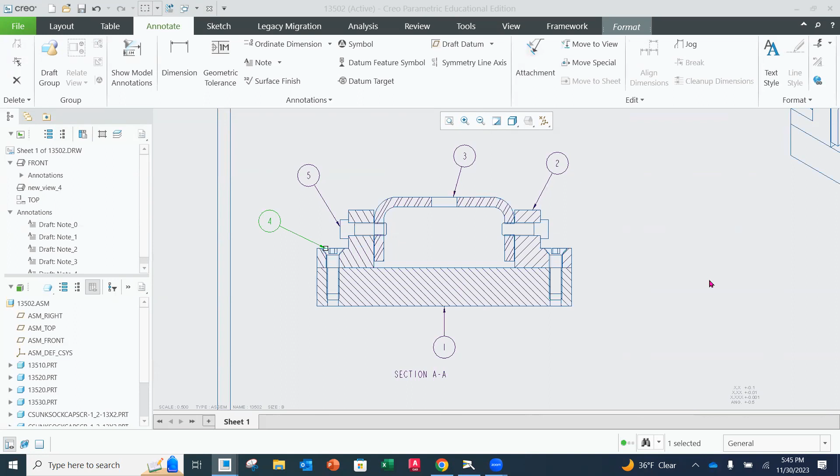Now, this is a killer in Creo. I played with this for, I think, two solid days, and I'm like, I can't believe we can't do this. I looked on YouTube, I asked Chum, and he's like, yeah, I don't know. So when we normally put center lines in, we click on the view and go to show model annotations, right? Well, when you do that, you go all the way over to this tab—there's no center lines to put in. And if you go to each one of these selections here, there's no center lines to put in.

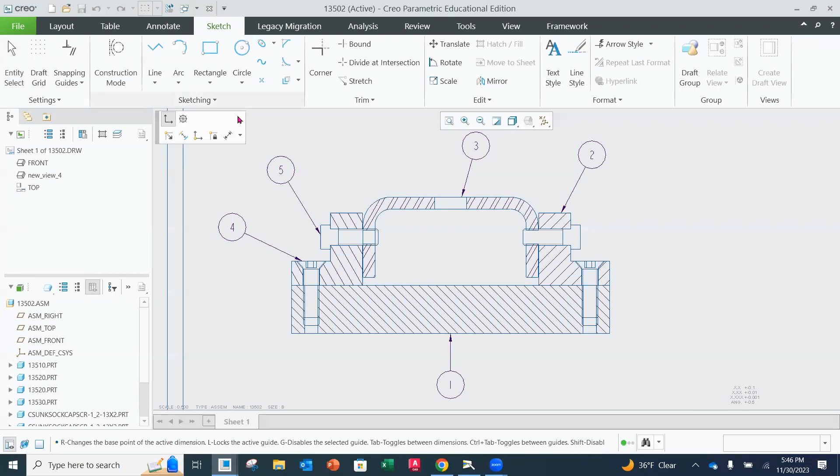No center lines, okay? So you can't put them in that way. Our other option is to put them in manually, and I'm going to have you do that. I'm sorry, it's just a little step we have to do. This is the only way I was able to figure out how to do it. If somebody finds a better way, please share with the group, because I exhausted all the ways I felt we could do it. So I'm open if someone finds a solution, but for now we're going to have to go into sketch line and put it in for each one of these.

Now it has to go down the center, so I'm going to stop that line. You're going to have to go to the ends and extend. If you try to put this over the top of where you believe the center is going to be, they're not going to be on the center and they're going to be a little bit wonky. And believe it or not, you can totally see that happen.

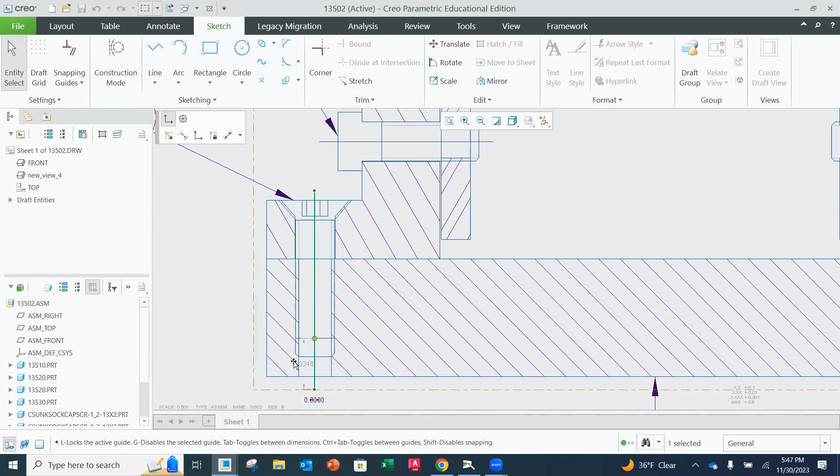So what I've been doing is when I lay my line down, I find where it snaps to a center, then another center. I stop my line, hit my middle mouse button twice, go over the top here, and then I can drag it and it'll stay in line, then release it. I know it's kind of not great, but I'm just putting the lines in for now. Same thing here, get to the middle, then move out and move out. Okay, and then do that for the other two.

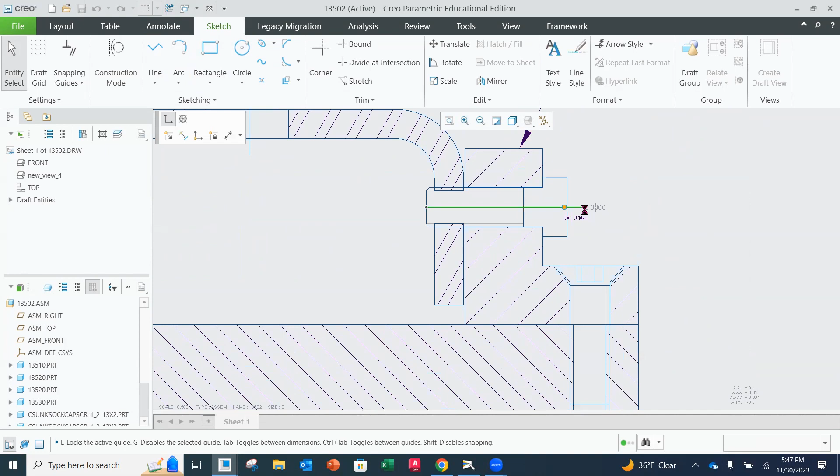And then we need to change the line type, because these aren't center lines, these are regular lines, so we've got to change them. Now I'm also going to tell you that you need to do this as the very last step, after you've got your assembly all set and it all looks good. Do not do this while you're still trying to solidify things, because if you move this view, these center lines won't move with it, and you've got to do it all over again. So make sure you do it at the end.

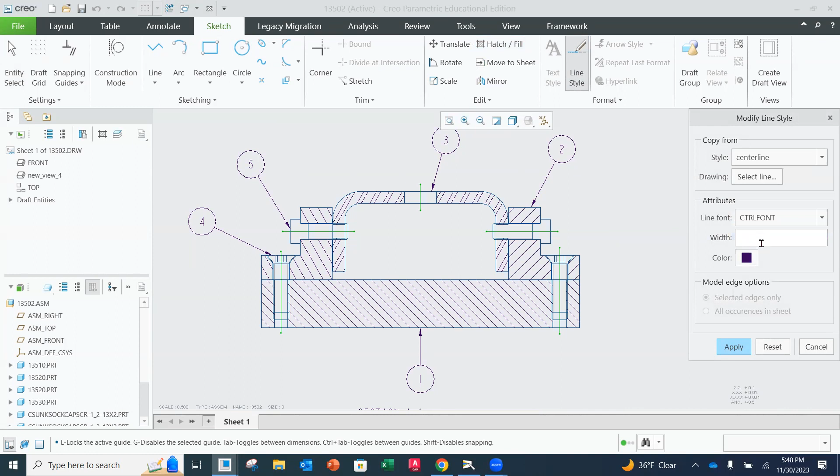Now to change these lines to center lines, I'm going to select, hold my control key, grab each one of them so you can multi-select. Then up on the top you can see where it says line style, and you're just going to click them all to center, then hit OK and close. Now you have your center lines in place. Make sure you add those, but then don't move the view anymore. So if we go back to layout over here, lock your view movement, and now you should be safe.

See, that didn't take long at all. So that is then our assembly drawing. When you make the PDF here, do not do a screenshot. We're going to continue, because we've got our border on and we want to make it look nice.

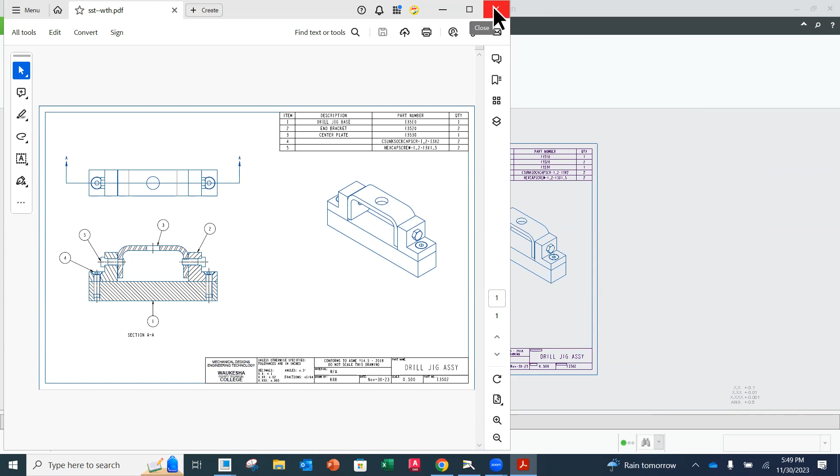We want to do file, save as, and go down to export. You're going to export it and save it to your working directory, and that's the file you're going to upload. If you pick a screenshot, it's all grainy and yucky, and I'm actually not accepting it. I've had a couple people do it, and I'm like, no, you have to do it through the save as command and create the PDF. So when you would release this to production, this is the format you'd want it in, not in that screenshotty mode. It does look so much better like that.

So that is a demonstration of creating the drawing. I have this recorded, so if you need to go back to this, you certainly may.

Couple things, I want to just do a quick reminder. Let me check, oops, I see there's something on the chat. Why not show the dimensions?

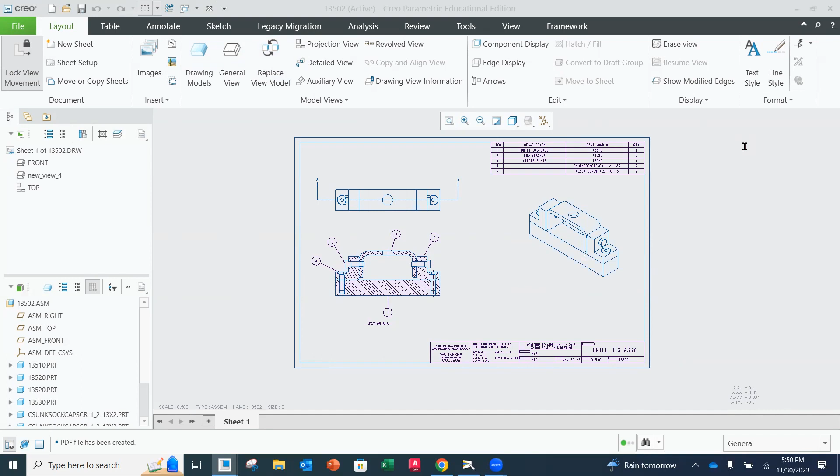Oh, because we don't show dimensions in assembly drawings. The dimensions are all going to be on the details. Now, if there was something you wanted to put in here as a reference dimension, you certainly could, but by design assembly drawings never have any sort of dimensions on them. That's defined in our details. We're not going to be doing the details for this, you just have to create the models. I want you to just focus on creating the assembly. Does that make sense? Okay.

So yeah, sorry, I meant why not bring the datums from the parts? Do you mean the axes?

Maybe you could do that. Maybe you know what? I'll have to see if I could do that from the part. Maybe you're right, I don't know.

I tried a couple different things. I did go back and activated the axes from the parts and they wouldn't show in the assembly. I tried to look through some settings and just couldn't find it. The last couple of days I've been playing with it, and I talked to Tom a little bit, and he said he doesn't know why it's not doing it.

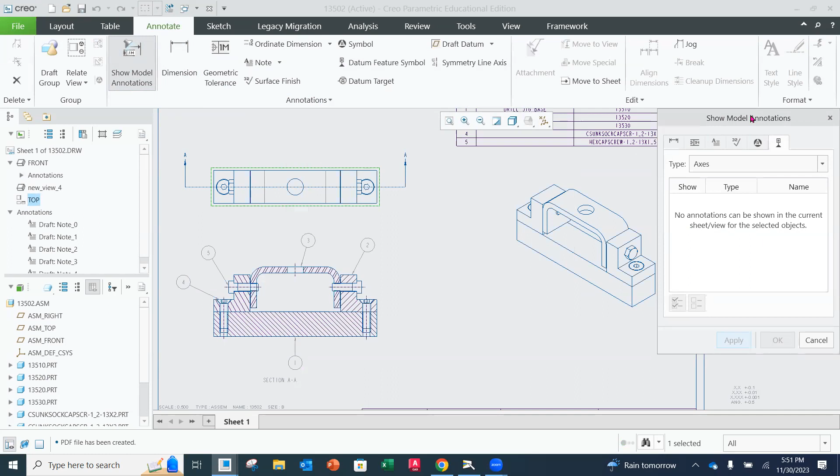Even if I go up to this view, even though that one's not a section, same thing - there's nothing there. It's the annotate, it won't show. I have to believe it can be done, but there's nothing here either in that top view. I was thinking maybe it was just because it was a section instead, but I couldn't figure it out.

So if anybody wants to be challenged and try to figure out the center line thing, it can be done - I know it can be done. If you come up with a process and want to demonstrate it, I'll give you extra credit and an extra piece of pizza next week, Thursday or whenever we have our pizza party.

I'd love to get that figured out, so for right now, that's our fix, because I do want them in the assembly drawing.

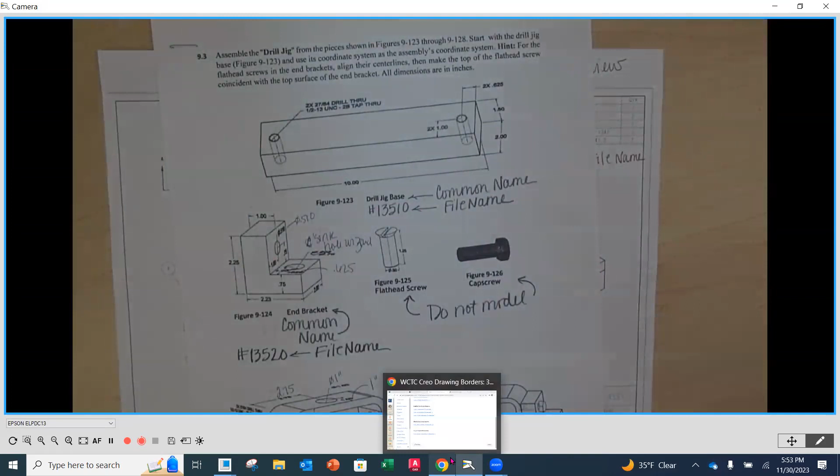Let's go over a couple things on this assignment before I let you loose. When you are creating these parts and modeling them, remember you're saving them as their part number, but inputting the common name as drill, jig, base, for instance - so that when it pulls into the bill of material, it automatically populates. Same thing for each one of these.

You are not modeling the hardware - you're using the intelligent fixture or intelligent fasteners, whatever it's called, on the tools menu. We're pulling those in.

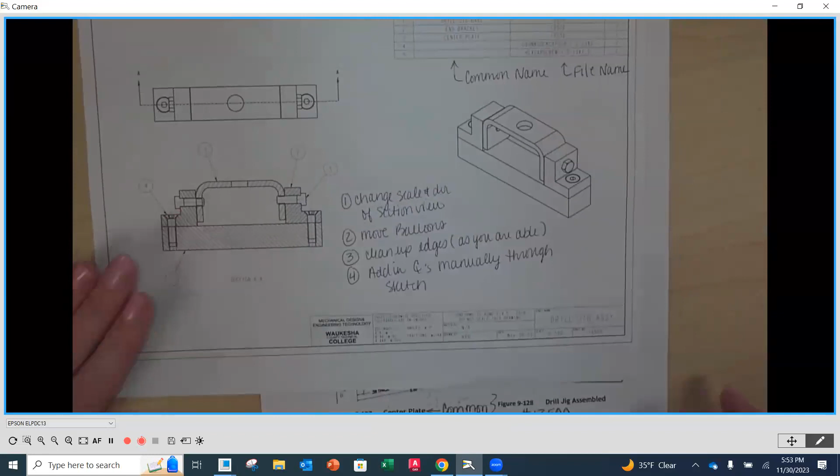I just want to confirm I went over all those things. Also, make sure you're pulling in the B-size assembly border, and it says 3 views. Then you're going to be doing the pictorial here, because that'll automatically generate our bill of material, put our views in place, and put our balloons on - those are automated to make it a little simpler.

Then you're going to be saving two things. For this assignment, I'm going to go to module number 6, for the second assignment, number 14 - this is the drill jig assembly. You're going to be uploading two things: the model, taking a screenshot of the model (that's what I have up here), and then a PDF through the save as command for the assembly drawing.

Each one of these is worth 10 points, so this total assignment is 20 points. No details for the individual parts - only model the individual parts, but it's going to be an assembly drawing for the assembly, and a model.

Any questions about that? Now, I realize not everybody's at this point, so you don't have to work on this right away. When you are ready to get here, if it ends up being a bit later, make sure you review this video, and if you have any questions as you're working, just let me know.